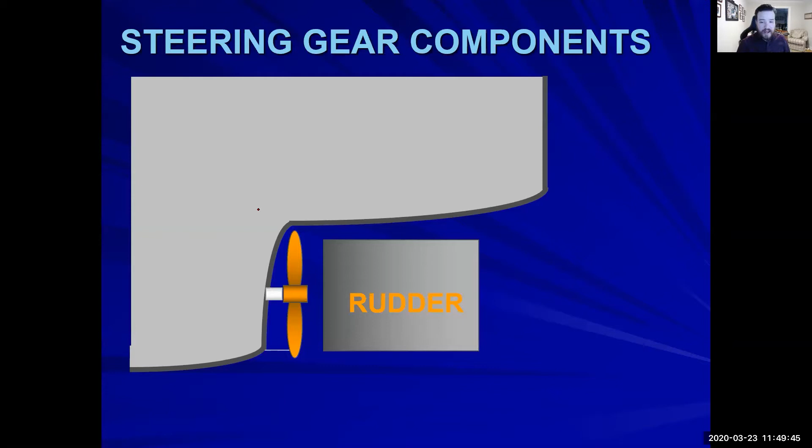Steering gear - we have our rudder, we have our rudder stock, we have our tiller, we have our steering gear pumps, our 6-way valve, and our rams. All right, big thing here.

With our 6-way valve, this only controls which steering gear pump is online. It does not control the flow of which way the rams go. They only control where the flow is coming from and where it is going to.

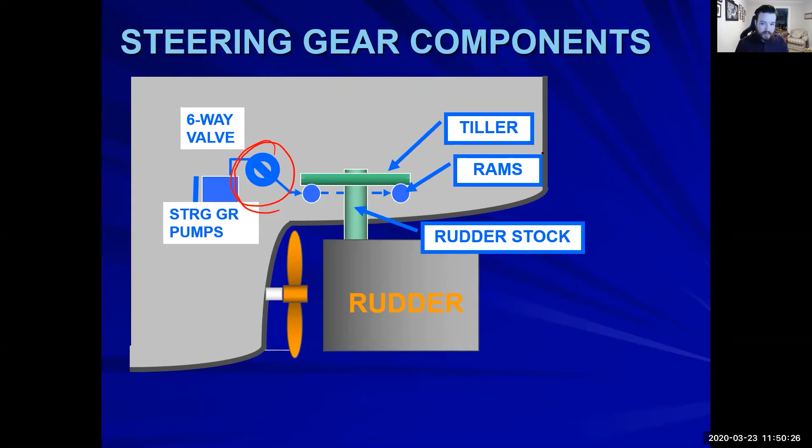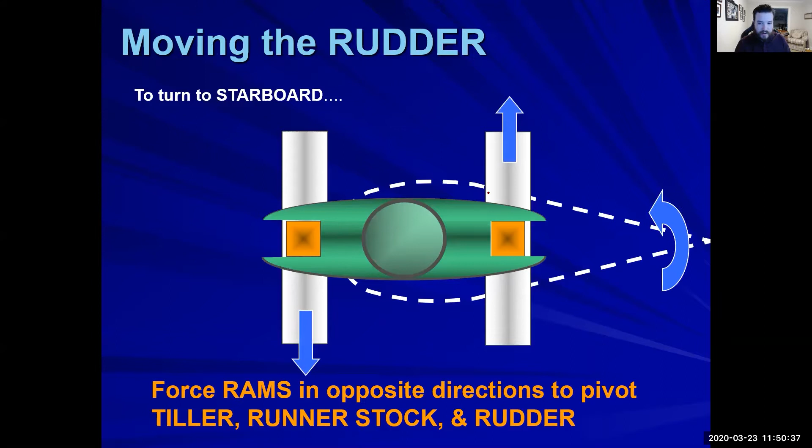So the rudder is moved by what's called the Rapson slide. The rudder is moved by these rams. So if you turn it to starboard, this is the Rapson slide that's actually happening. This is basically a cube that sits on top of the slide, on top of the ram itself, and the Rapson slide is hugging it basically on either side. There's no gears internal of it - there's nothing in here that's doing any sort of gearing. It's basically metal on metal that's sliding across itself.

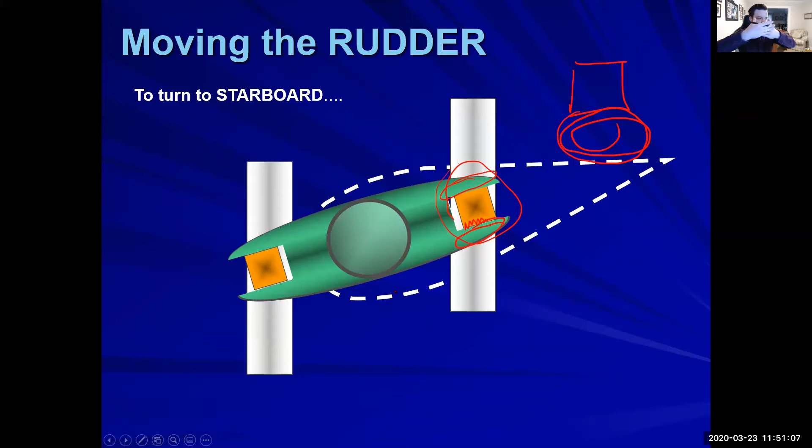So the rams are going to be moved by our steering gear pumps. We have a starboard discharge right now, and with that starboard discharge, we're not only pumping hydraulic fluid into here and into here, but we're sucking out hydraulic fluid on the opposite side of the rams, and they're going into these cylinders and pushing the rams in opposite directions.

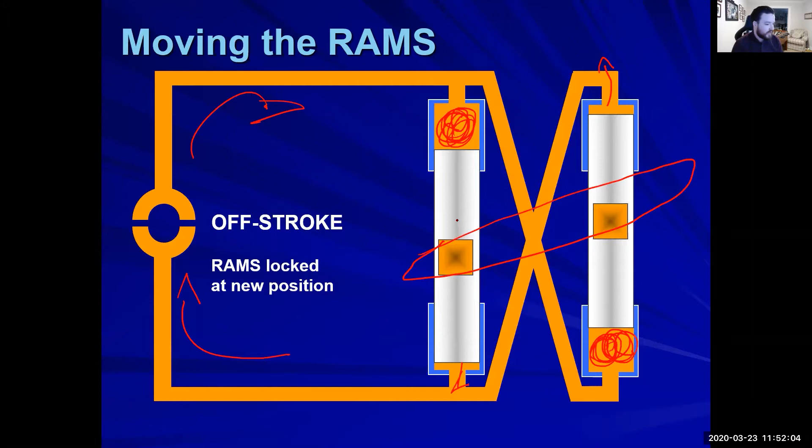So now basically our rudder would look like this in this position of what we see here. So if we have a port discharge, the opposite is what's going to be happening.

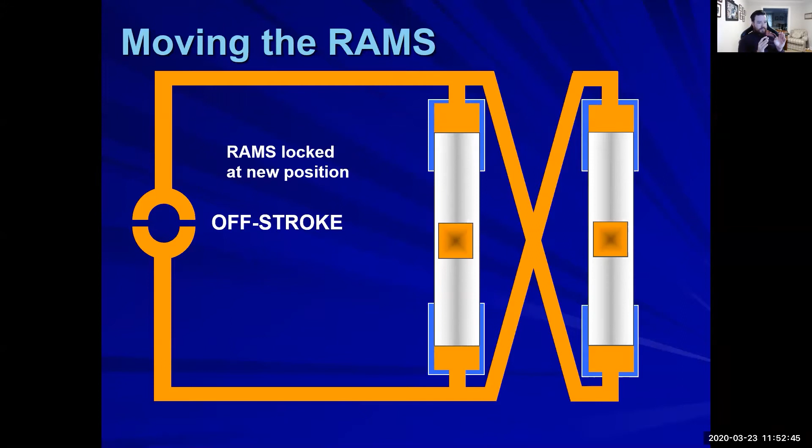All right, so remember we have our actual pump - it's always spinning. And the tilt plate right here is what's going to be controlling the flow. We still have all of our little pistons inside going up and down. The tilt plate is in its neutral position, you're going to have no flow going out.

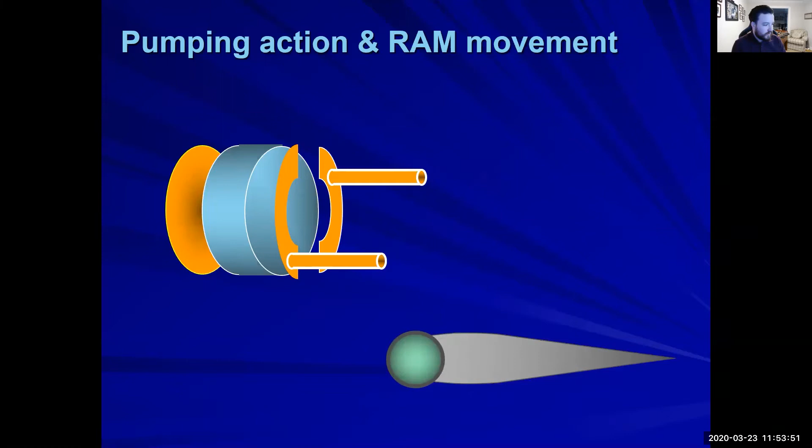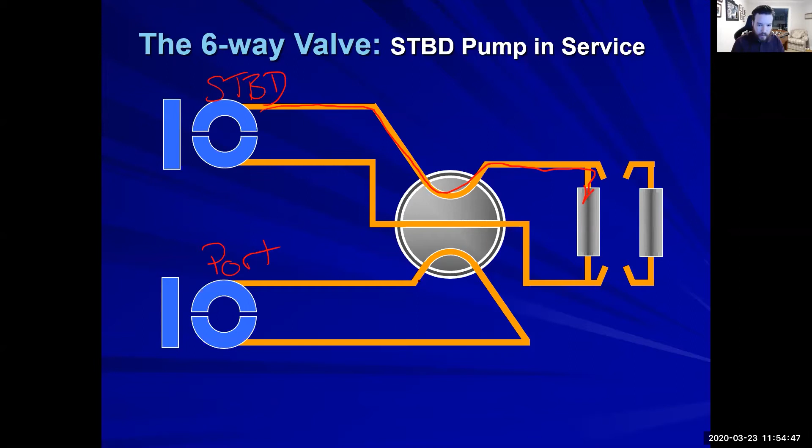If you know, just unmute yourself and say it to the group. Starboard's online - the starboard is online. We can tell because we can trace out these lines as they go into the rams, and the port one is just recirculating itself. So the starboard pump is online and the port pump is either on standby or it's running, but it's not actually producing flow to go to the rams - it's just recirculating itself.

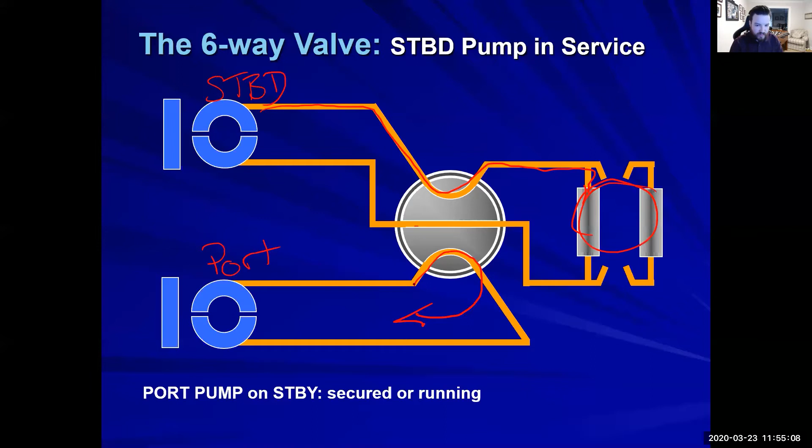Now, the big thing is like what we talked about two weeks ago - these tilt plates right here and right here are both going to be operated. The yoke from the differential is going to be tilting both of them at the same time, but because of the six-way valve, only one of them is actually going to be sending fluid to the rams themselves.

So we have flow going, our tilt plate has moved, and as you can see, only the starboard pump is actually going to be influencing which way the rams are going. The port pump is just recirculating. We come back to neutral, and the rams are hydraulically locked at that position. We go the opposite direction - it still does not matter, the port pump is still on standby.

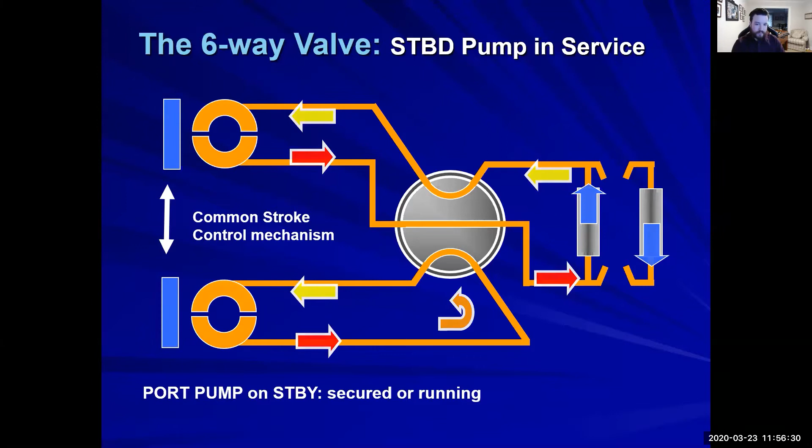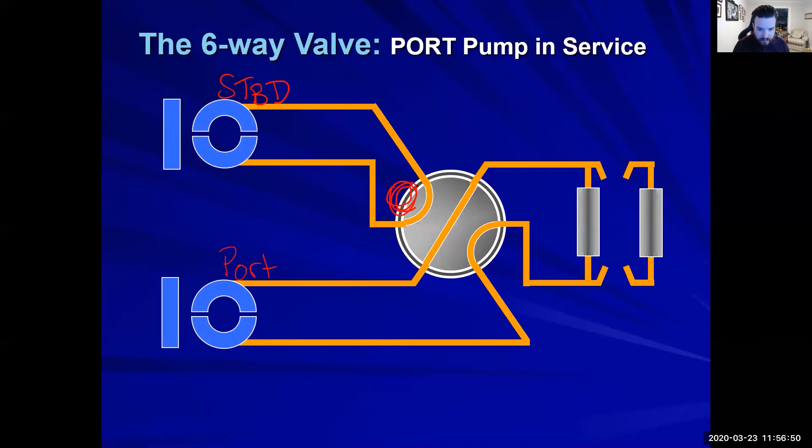All right, and now we have switched, and our six-way valve is now going to have the port pump online, and the starboard pump is now on standby. It's recirculating right here. The same thing again—it has complete control over which pump is going to be the one that's actually influencing our rams.

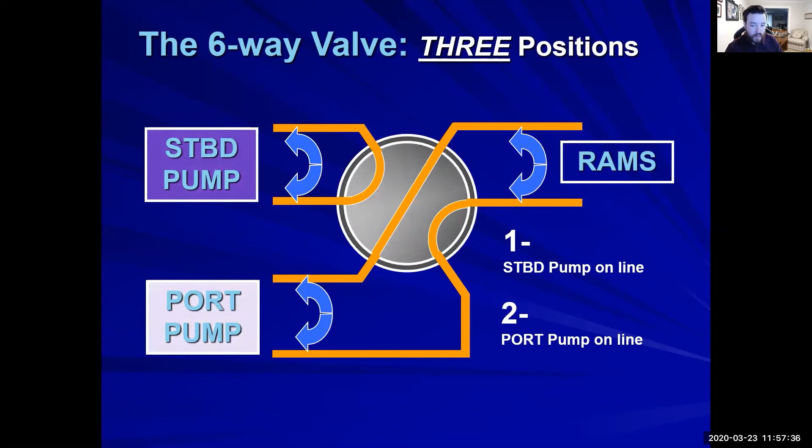So we have three positions, even though it's called a six-way valve. It's called a six-way valve because there are six ways the fluid can actually be going. So we have our starboard pump online and our port pump on standby. The second position is the port pump online and the starboard pump in standby. And the third position is where it's locked—the rudder is hydraulically locked, and there's no fluid flowing in any direction.

We would use this when we're in the shipyard and in dry dock and need to do something with the main shaft, like pulling it out, or doing work on the rudder itself. We want to basically dead stick our ship, meaning we have no power on the ship, like when going up the Hudson or something like that.

And basically tugs want to have full control and predictability. We don't want the rudder to just be going off and doing whatever it wants.

So does that mean that we don't need to change valves to relocate our rudder? What do you mean by that? Previous page.

So remember, this is a 6-way valve. It's going to be spinning on an axis, spinning in a direction either this way or that way. As it spins, it's going to choose which way the flow is going to be going. So if we have our rudder here, in order to change the direction, we don't change our 6-way valve's position.

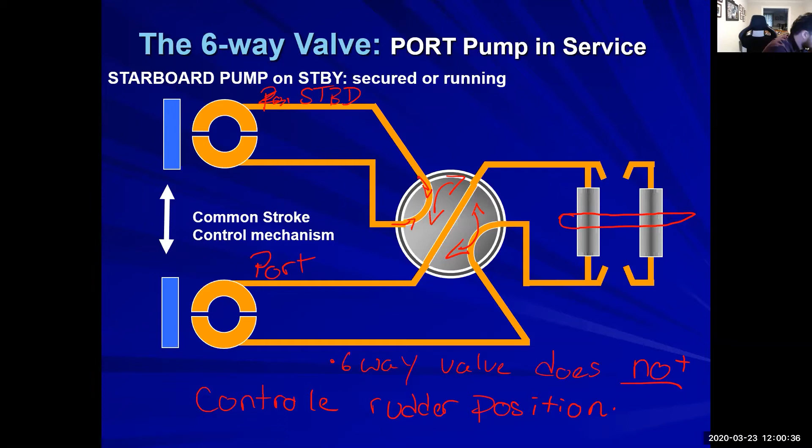Okay, so the third position is—like I said—for when you don't have power. You don't want to have, if you are trying to lock it, it's not going to be utilized during normal procedures. You're not going to be locking the rudder when you're going across the Atlantic or anything like that. This is for emergency situations, when you are allowing tugboats to have full control over you, if you don't have power, or if you have a leak on one side or the other.

So if any movement of your—say if you have a leak coming out of your rudder stock, with any movement that you have, that's when you would want to have your six-way valve locked, so that way you don't have any movement coming in. Remember, both of your tilt plates control the flow of hydraulic oil.

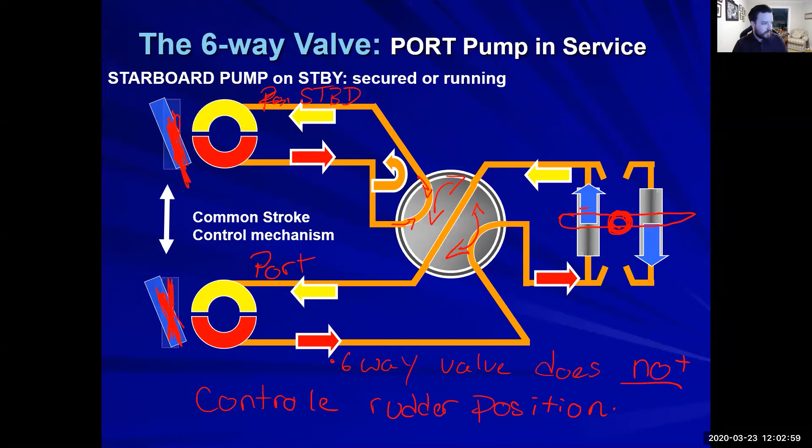So rudder locked is going to be like an emergency situation. It's going to be if you want to be dead sticking, which is when you have no power on the vessel and tugs are going to be pulling you to the boneyard or scrapyard to make the ship into razor blades, or if you just came out of dry dock, anything like that. How's the rudder lock with pumps offline different?

All right, any questions on that? Is there any significance to having one pump on and not the other? Like, will the port pump make me turn faster towards the port side? No, it'll have no difference for what's going on.

It's basically a backup. Like we talked about in class, if you have a lead-lag scenario, this wouldn't be that. This would be: you have your port pump online, starboard is on backup. So if you're going through Hell's Gate, you don't want a pump that's going to go offline suddenly and leave you with no ability to steer. You'd only want to be able to change over your six-way valve really quick, and then you have steering back.

These are just backup scenarios, basically weekly or monthly depending on what ship you go onto, your pumps will be changed over. So we're going to go to starboard this week, next week we're going to go to port pump. You just basically go back and forth. Any other questions?

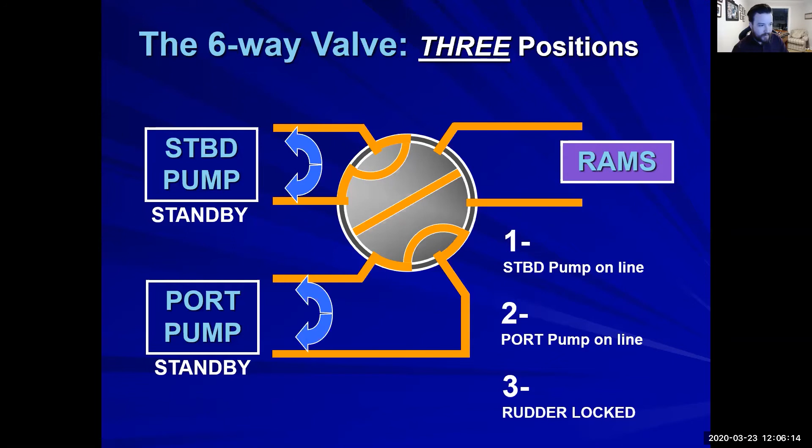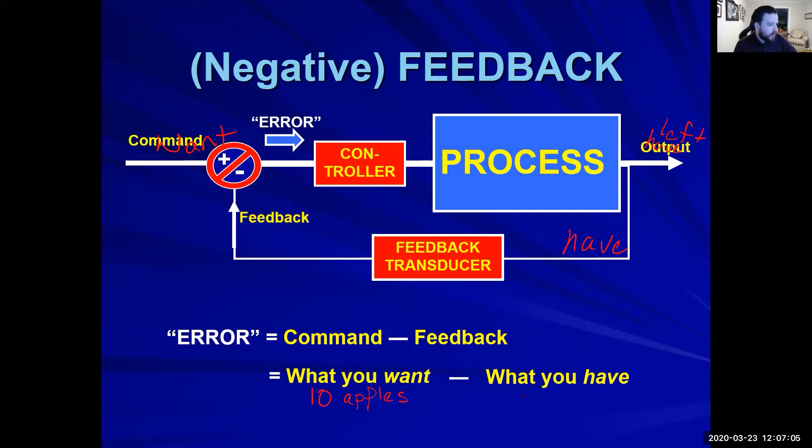If you're having a recipe that calls for 10 apples, you want 10 apples. What you have in your cart at that moment when you reach the apple bin in the grocery store is 0, so 10 minus 0 means you still need 10 apples. Now you still want 10 apples, but what you have at that moment is 1 apple, so now your error is 9 apples. That's constantly happening when you have negative feedback.

You're not sitting there doing this basically naturally - you're not going 'oh, I need 10 apples, oh I need 10 apples, oh I need 10 apples' and counting up to 10 every single time. You're basically grabbing an apple out of the cart: okay, now I need 8, 7, 6, 5, as you go through with it. That's a negative feedback loop.

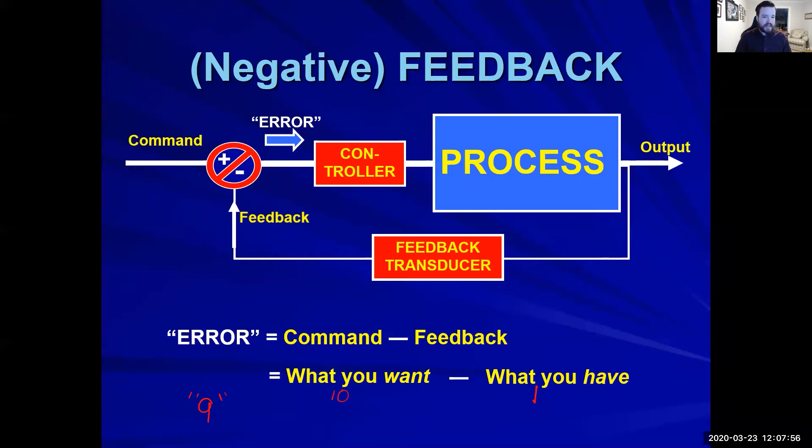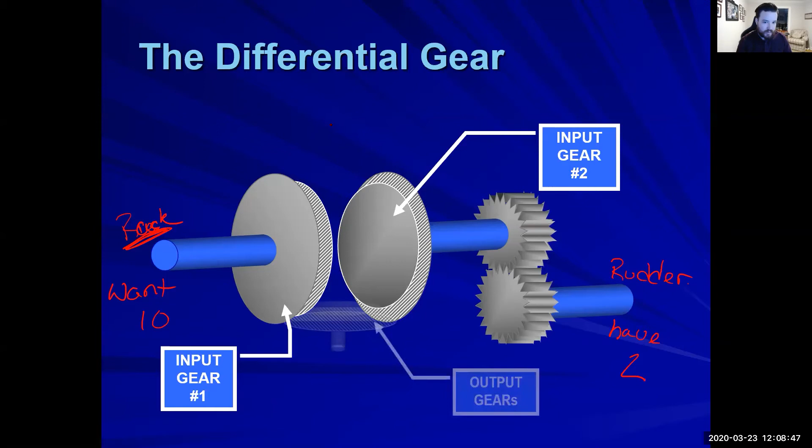Whereas the rack, this is our want, and this is our have. So we want 10 apples, and we have, right now, 2 apples. So our output, coming out on our output, means that we still need 8. So this is our want, and this is our have.

So as these turn with a differential - when you guys had your last lab, a lot of people learned about the spider legs. The spider legs are what come off of this yoke, so they go up and out and right to the tilt plate. That's what you're seeing as far as the movement is coming from these yokes.

That's a laser pointer, that's not a pen.

This yoke is controlled basically by these input gears. If you take your right hand and your left hand and try to put them together like this, and if you turn one hand or the other, it's going to force based on each force happening with those gears. It's pulling it. You could feel one hand having to go in the opposite direction to allow you to move. So your left hand down here is your input gear, and your right hand up here is going to be the output.

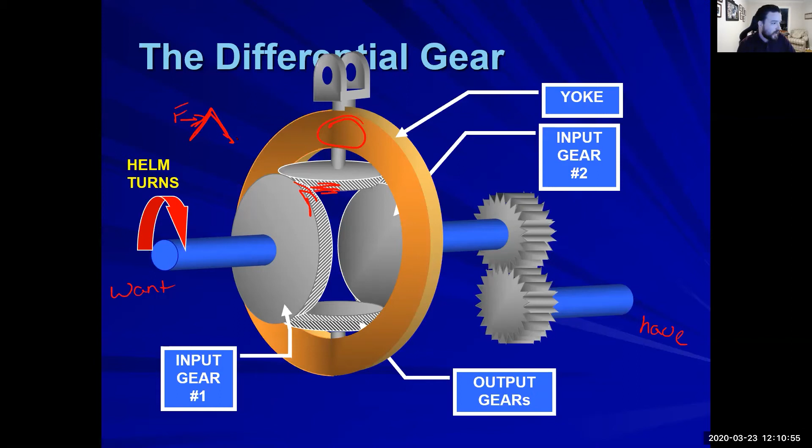If you start spinning this input, it's forcing your other hand to go in that direction. That's what's happening here. These gears right here and right here are forcing this yoke to move because it has nowhere else to go. They are geared together. Each gear is applying a force on that gear tooth, and that gear tooth has nowhere else to go, so it has to go in the only direction it can, which is to spin. And in turn, it's going to spin this yoke.

Now, this input gear coming in here is what we have at that moment. That is coming from our rudder, and that's what's causing our negative feedback loop. It's what we want. This is what we have at this moment, and what it's coming together with is what's telling our tilt plate.

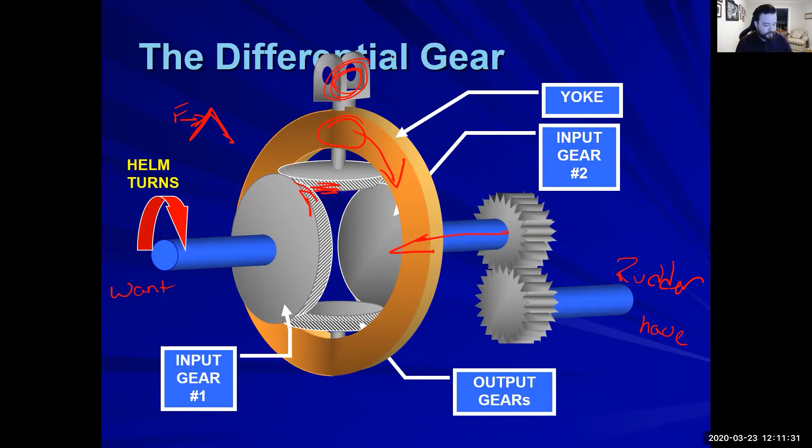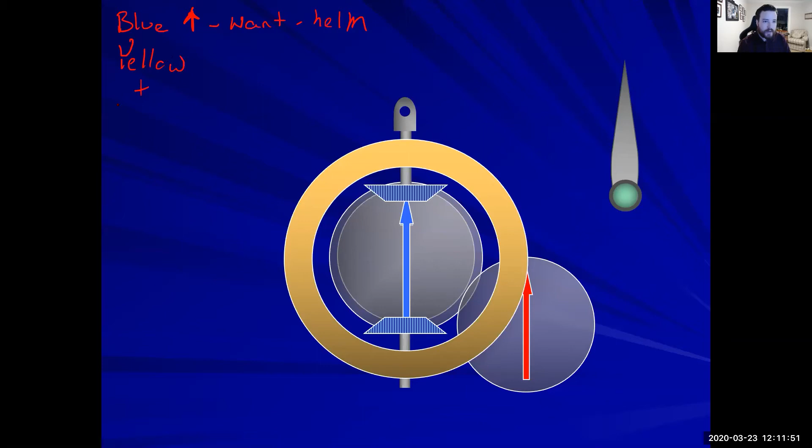So the blue arrow itself, that is going to be our want, or our helm. Our yellow and red, and that is what we have, and that is our rudder.

So as the blue arrow is moving, that is coming from our helm. It has moved the yoke. And now watch this with new eyes as you go through with this. Watch that again. We want to turn to starboard. The yoke is turning. Great, great, great. As our feedback comes in, watch the yellow and how it corresponds to what's happening with our yoke.

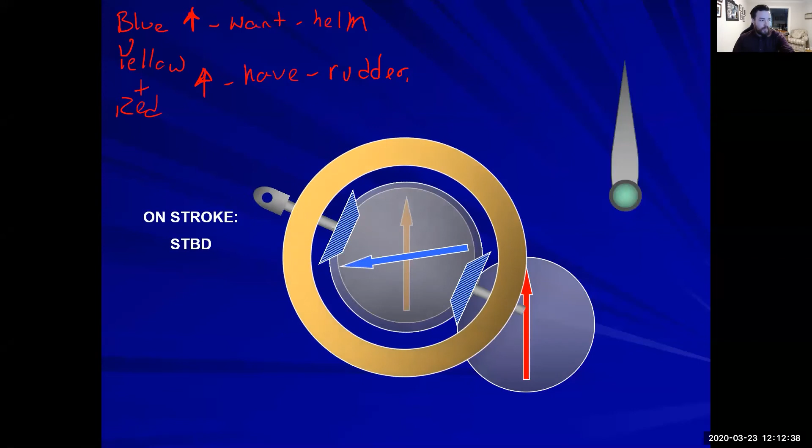We are having an input put in. We want 10 apples here. All right, we have 9, 8, 7, 6, 5, 4, 3, 2, 1, 0. We are now at what we actually have achieved. And that is why every single time as we go through, we are having less and less need to be on like an on-stroke mentality.

Does this differential make sense? More sense than what we were seeing last time? Doing good? Okay. Any questions on the differential before we continue with the rest of today's lesson? Nope? Okay.

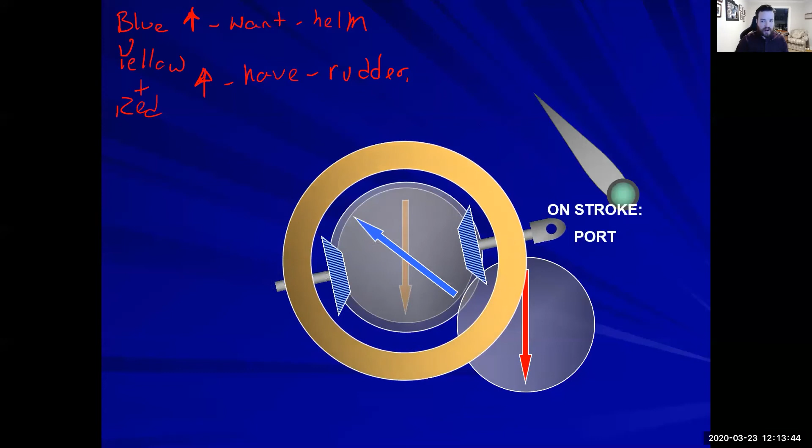So same thing as we go back. We're on stroke, we're going to starboard. The yoke is changing our tilt plate. We have a matching, basically the rudder matches. That input comes back in. Now we want to go back to center, so now we're going to have a stroke that's going to port. So now it's moving all of it back the opposite direction.

So what turns the input gears? All right, so we have two things. Input gear number 2 is coming from the rudder, and input gear number 1 is coming from the rack.

Does this change for different types of steering, like if it's follow-up or non-follow-up, or if it's the wheel or the stick? If you have a joystick versus a rudder, let's just keep to a steering wheel itself at this point. If you were to utilize a stick, it would have the same idea, but let's stick with just the helm itself and not go to a rudder. Thinking of a joystick in that mentality just gets confusing as far as where we're going. It will still have the same effect of what we're doing, but it gets a little more convoluted to understand. Stick around at the end of the lesson, we can go over that if you want to.

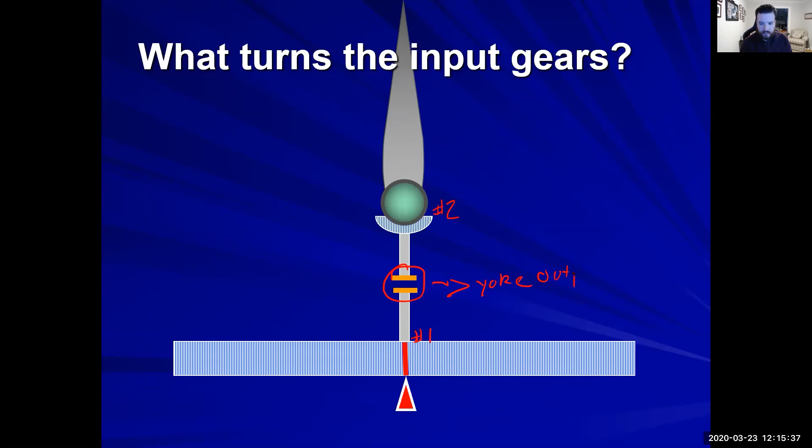So we have what's called the rack and the rack's position. The rack is basically an entire gear that's opened up. There's all these teeth all along it. And a position on the rack is a direct indicator for what you want to do with the rudder.

You'll have your 0, and that will be the center line of the ship. You'll have a 5 degree, you'll have a 10 degree, and all the little lines. It will basically look like a tape measure on there.

Now this right here, this shaft coming out, is going to be a gear, as I show off my drawing abilities of a gear. This is going to be spun. This gear right here is laying on top of the rack, and it's going to be spun by the direction of which way the rack goes.

There was a question here: when the yellow arrow turns, is that desired? We have reached the desired rudder angle. Yeah, so when the yellow arrow is turning, that is basically what is coming back in from the rudder. What's happening is we are at the blue arrow on the last screen as we go back. So as the blue arrow turns, that's coming in from the rack. That is what we want.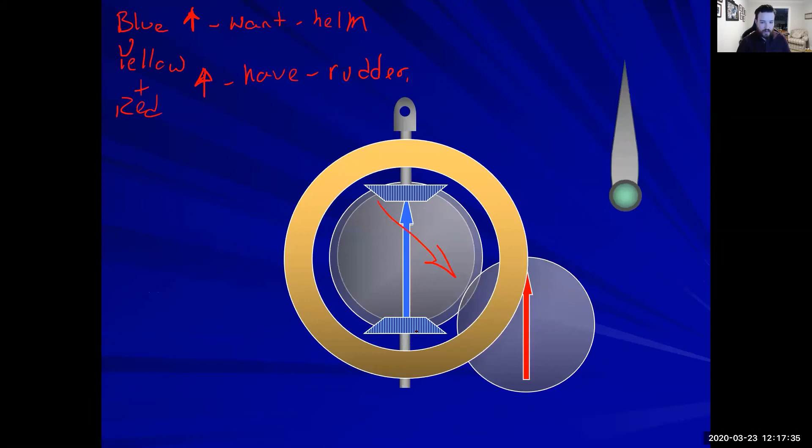And as the yellow arrow is turning, say it was like here, halfway, that means that the rudder is in its halfway position to what we want. And if you notice the yoke, watch the yoke as the yellow comes back. The yoke is slowly turning back and it goes to its neutral position. As soon as the two arrows meet and come together, that is when we are now on a 0 stroke. We are in a neutral position. We are no longer having any flow going through our hydraulic pump.

So we have our rudder position, we have our rack position, we have our tilt box. Let me delete some of this nonsense. This goes directly out to our tilt box. This is the yoke, like I said. So whichever way the rack goes, that is going to be directly affecting which way the rudder is going to be turning.

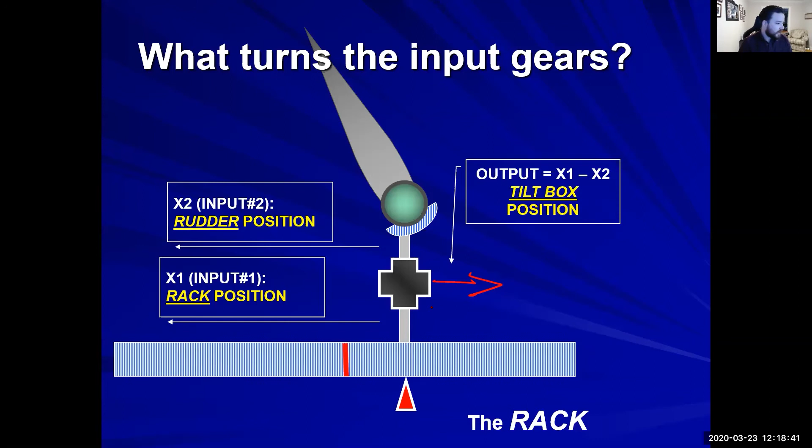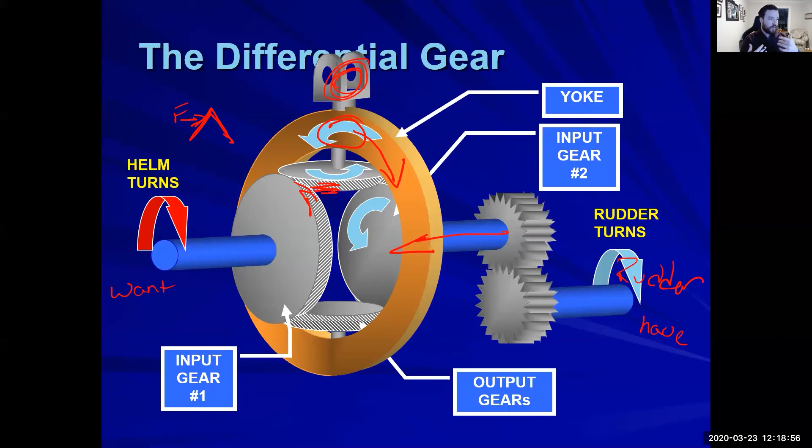Can you explain what the yellow does again? That yellow arrow is what's coming in from the rudder. That is our input, basically our negative feedback. That's how many apples we have in our cart presently. So the yellow arrow is what we have at that moment.

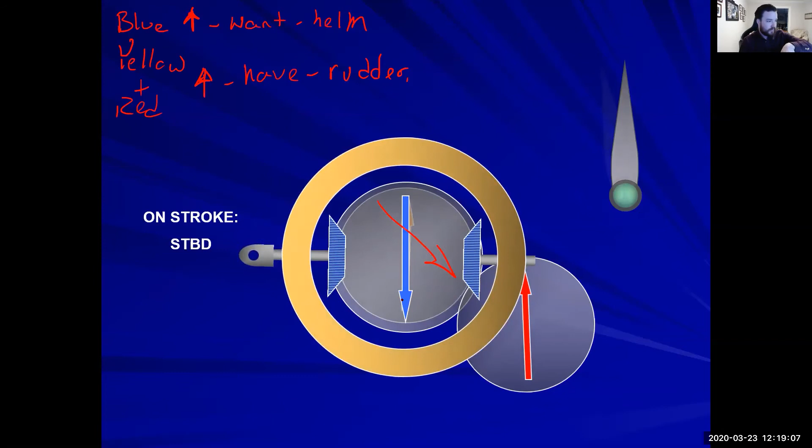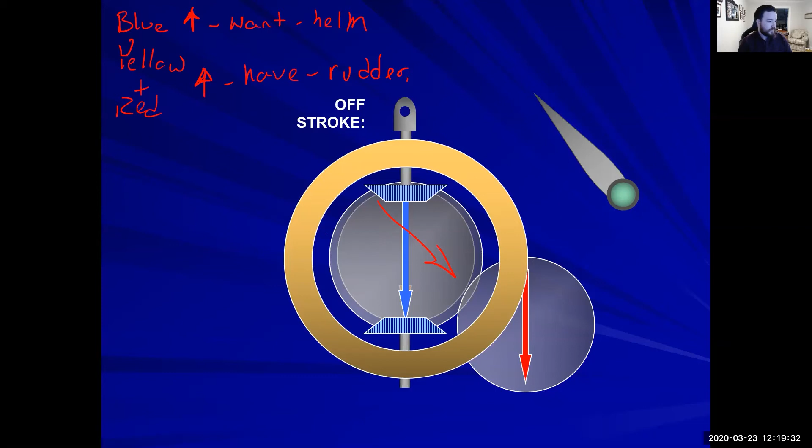Whether we want to go to 10 degrees right rudder, while it's moving, we're going, okay, now we're at 1 degree right rudder. So the yellow is saying, okay, we have 1. And as it continues down that line until it reaches 10, it's going to be saying, we still don't have what you're telling me we need to have. Does that make sense? Okay.

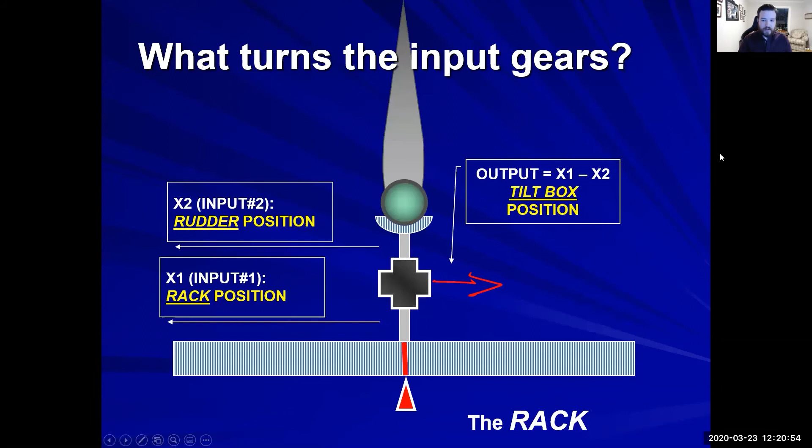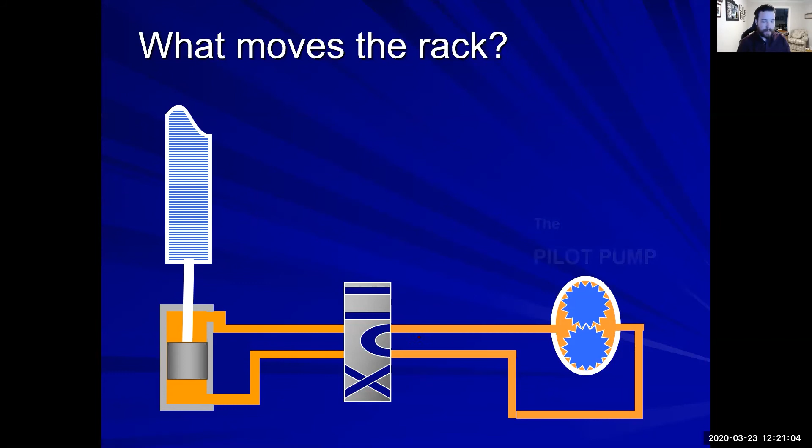So now we're going to go through what actually moves the rack. The rack is moved via hydraulics. We have this pilot pump. This pilot pump is going to be spinning at all times, it's not going to not be spinning. We have 3 positions with the shuttle valve: we have a normal flow right here, we have a reverse flow, and we have a recirculating.

So as the pilot pump is always pumping, when we have our steering gear system up, we are going to be in one position or the other. If we're in this position, we have a straight flow. We can see hydraulic oil comes through and onto this side, and we have pushed the rack this direction.

Now, if we go the other way, we have a cross flow. That means we are now pushing on this side and sucking from the other side. This side was pushed and this side had flow that was getting sucked out of it.

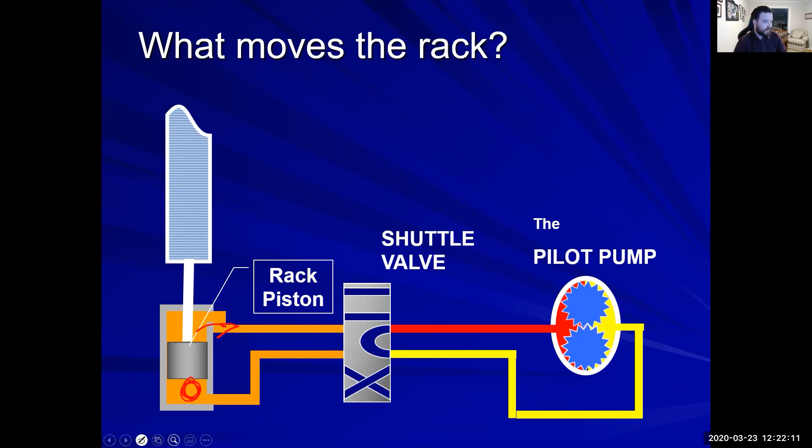Now, what controls the shuttle valve? The shuttle valve is directly controlled via the bridge. This is where the helm sends the signal.

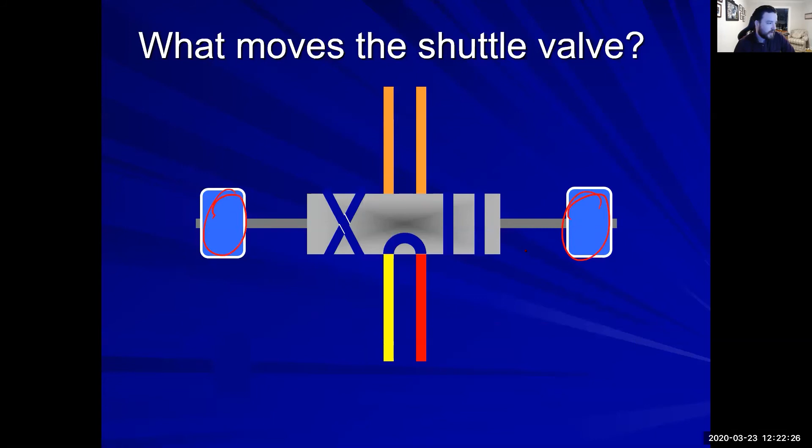Over here is a solenoid valve, and over here is a solenoid valve. They're basically magnets, electrically coiled wire with a magnet in the middle, and that magnet in the middle are these poles.

So when the solenoid is energized, you can see it pulls in the magnet, and vice versa.

So we have, like I talked about in class, two different types of solenoid valves: a normally open and a normally closed solenoid valve. A normally open solenoid valve is when it's de-energized, the magnet is normally pulled into the coil. My fingers are the coil, and this is the magnet. It's going to be pulled into it. Normally open is when there's no electricity flowing through the wires.

Normally closed is the opposite. If there's no electricity, the magnet is pushed out.

Now, both of these are done for safety. Normally open, just like when we were talking about making water, if you were to lose electricity, you would not want to send salt water to your distillate tanks. So a normally open valve would not be utilized on the valve that goes to your distillate tanks. It would be utilized as your dump valve, so if you lose electricity, water would flow and then dump. Now, the valve that would protect your distillate tanks would be normally closed, so if there's no electricity, it's stopped and no water will flow into it because it's in a normally closed position.

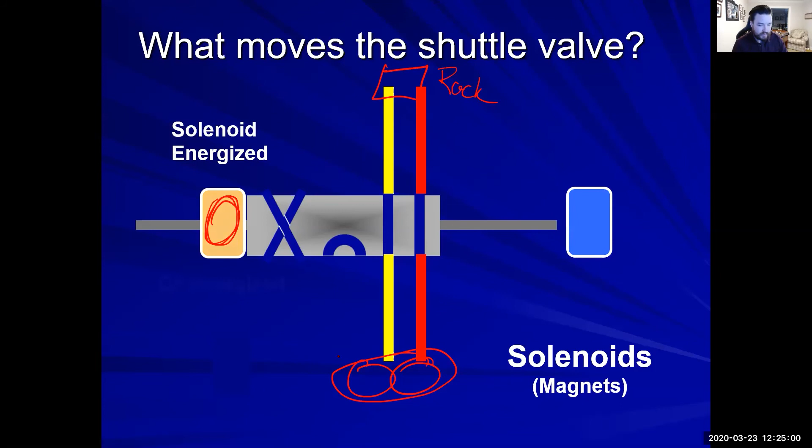It de-energizes, we have no flow. It is still recirculating through the pilot pump, but the rack has not moved. We want to go in the opposite direction, so we are now going with a cross flow, and our rack is getting flow. The piston is moving, and the pilot pump is still having flow going through it.

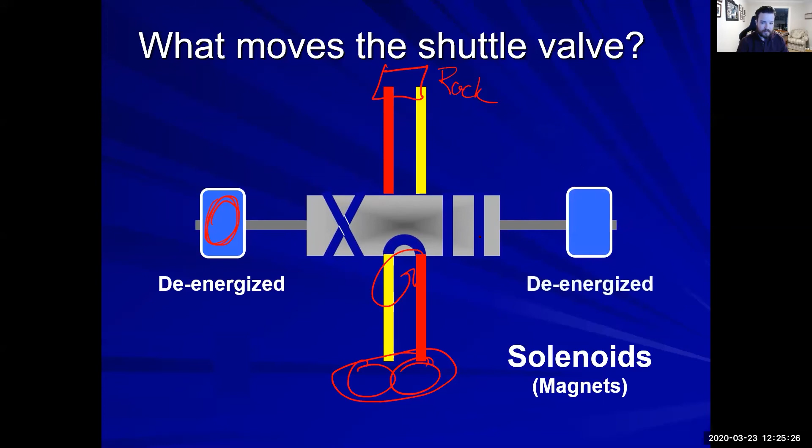So how are the solenoids energized? This is what we didn't get to last class. So when you turn the steering wheel, you are going to be generating an electrical signal.

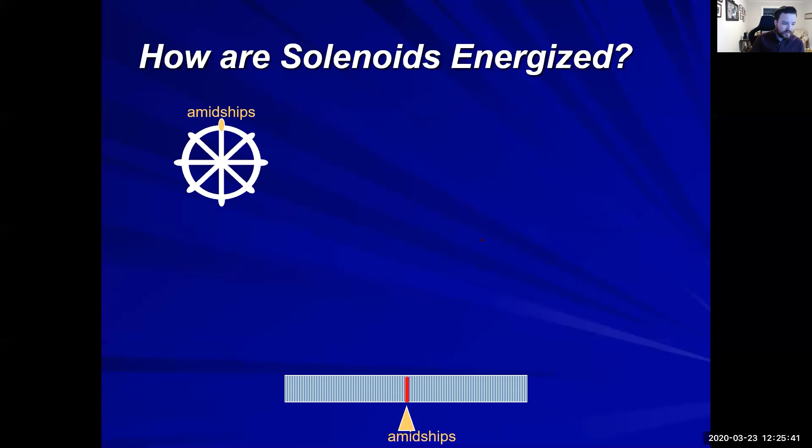So when you turn to port, you are going to generate a positive voltage. The more you turn to port, the greater the voltage is, so they're proportional. And again, if you have less of a turn to port, it's going to be a lesser voltage.

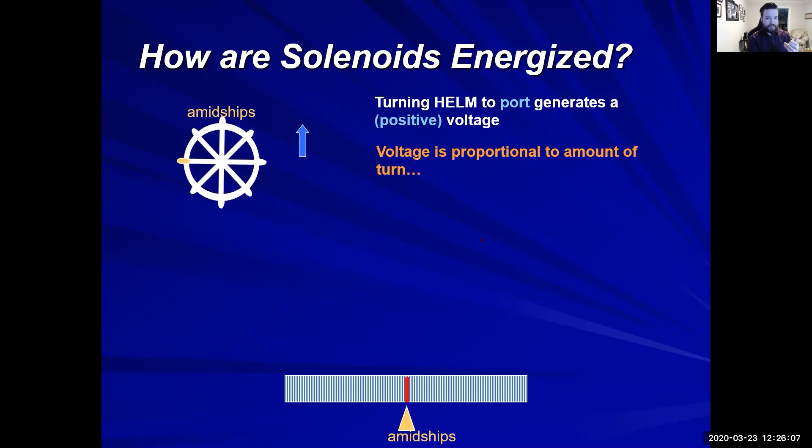Now, when you go to starboard, you are going to have a negative voltage, and the same thing again, it's proportional. The more you turn to starboard, the greater the negative voltage is going to be.

And now you can see the rack moves to port, generates a positive voltage. The more it turns, the greater the voltage you're going to have. They're both proportional to each other.

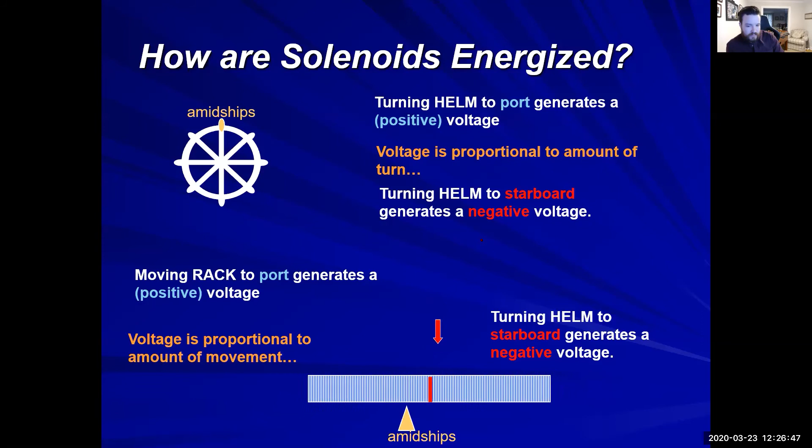We'll get back into this when we do electrical, but for right now, we're not going to deal with this. So these couple of slides, skip when you're doing your own review.

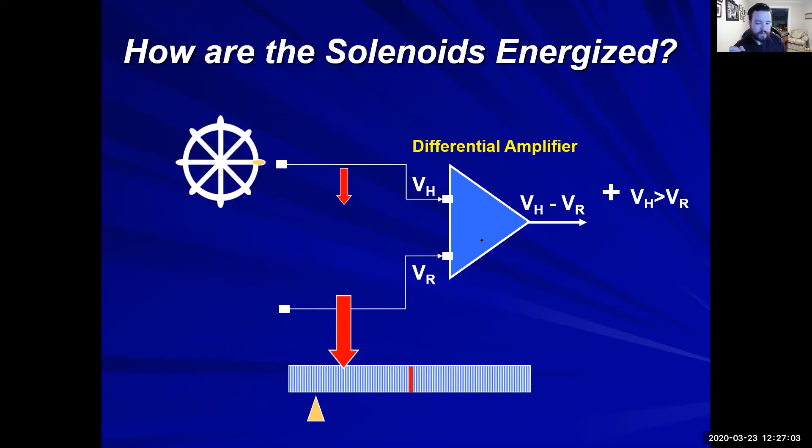So we have our helm position and we have our rack position, and we have our difference, kind of the same thought as our have and our want. So the helm position goes to port, so we have a positive voltage, so it sucks in on this side.

All right, when the helm position equals the rack position, now we have a difference of 0. So we go into neutral.

So now we're just going to be flowing back to our pilot valve. And then the opposite is true. When we go to starboard, you're going to have a negative, because the helm has a negative voltage. The rack position has not met that negative voltage. It has not equaled it to create 0. And as soon as it does, we go to a 0 position, but our rack has not moved past that.

Just because we have a 0 differential doesn't mean that the rack has now moved back to the 0 point. It just means that both the helm and the rack are both in the same position. So if we want 10 degrees starboard, until we achieve 10 degrees position on our rack, remember I told you the rack has different markings on it.

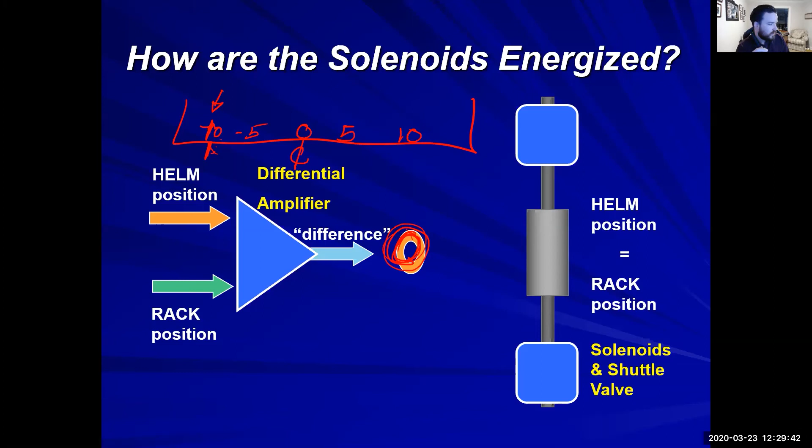All right, does that make sense? Does anybody have any questions on it? Okay, take your eerie silence as a yes.

So as we go through the steering sequence, there's almost 2 parts to it. Part 1, as we go through, you have your steering gear pump running on off stroke. So the tilt plate is in the neutral position. The pilot pump is running. It's recirculating right now. We are not having any flow going to the rack.

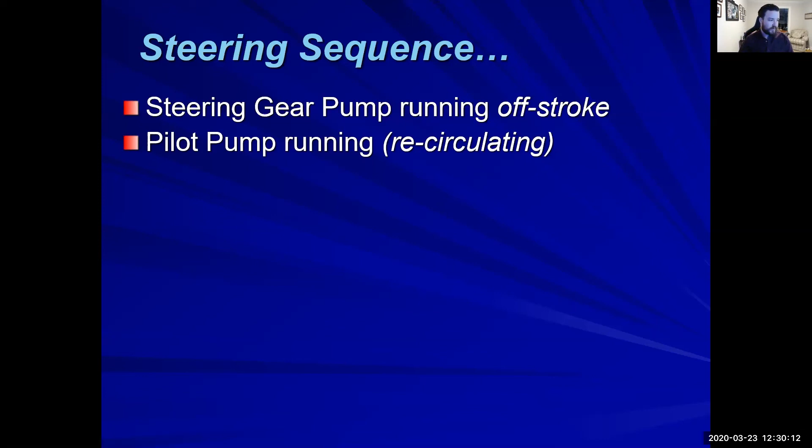So the helm calls for right rudder. The starboard solenoid valve energizes. The shuttle valve position directs the pilot pump discharge to the rack piston. So that whole entire evolution we just talked about with our solenoid.

The starboard solenoid is energized. We now have flow going through to our rack, and it's pushing our rack. And as soon as the two meet and have a zero differential, that starboard solenoid valve will de-energize and bring it back into the neutral position. And the rack will stay in the position it was affixed at.

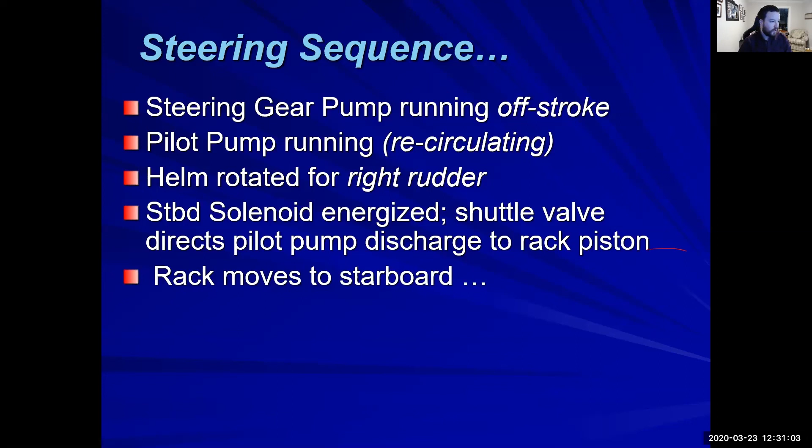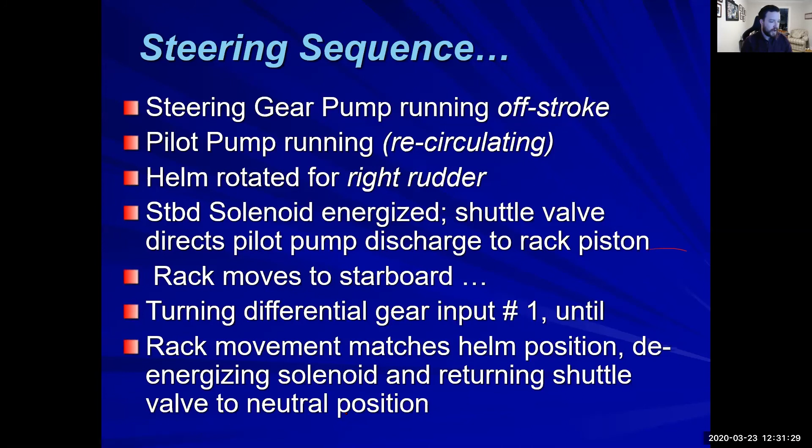So the rack moves to starboard, turning the differential gear number 1. So this is the position that's coming from the helm, from the rack. So the rack movement matches the helm position. It de-energizes the solenoid and returns the shuttle valve to the neutral position. So now we have no flow coming out of that pilot, it's just recirculating.

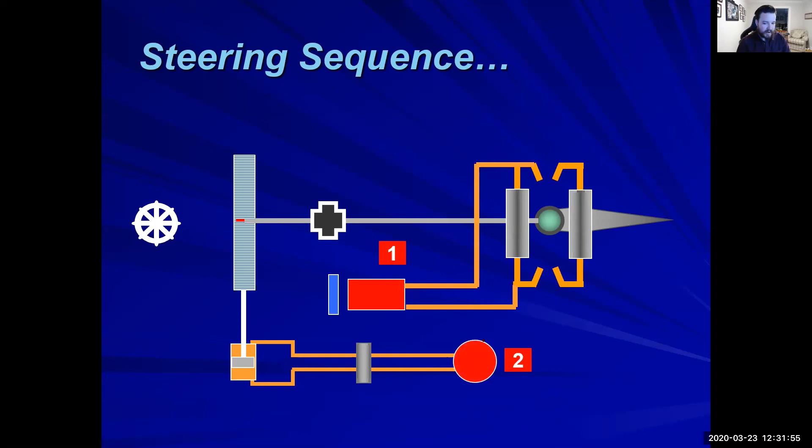All right, so this is what it is in image. It's going to use numbers. Unfortunately, it doesn't have numbers here. So number 1, this is our steering gear pump. It is just moving, not circulating any hydraulic oil. Here's our pilot pump. Again, it's just moving, it's not circulating anything. When I say it's not circulating, it's not going to our rams and it's not going to our pistons. It's just recirculating the flow.

We turn our helm to starboard. Turning our helm to starboard, we are now going to get movement. Our shuttle valve moves. The solenoid valve sucks it in. We now have flow. Our pilot piston comes up, so all of that flow comes in here. All of the hydraulic oil gets sucked out.

All right, we meet whatever order we wanted. If we wanted 10 degrees right rudder, as soon as this reads 10 degrees right rudder, we send a signal out to our shuttle valve and says, hey, it's the same as what we wanted. It's 0. De-energize our solenoid valve, and now we are just going to be recirculating here.

But just like what's happening in our differential gear, as soon as we have movement on this rack, we are getting input going into our differential. We now have movement going into our differential, which means that our tilt plate will start to move. So we have now moved on the rack. The rack has now given an input. The differential gear output puts steering pump on stroke. So the steering pump tilt plate has now moved.

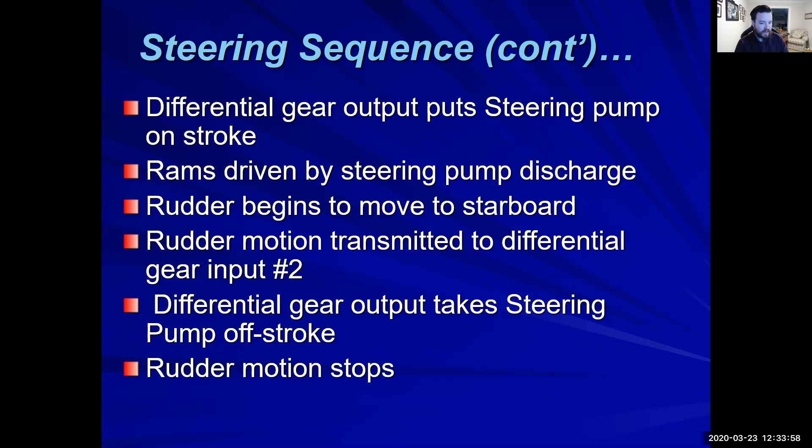The rams driven by the steering pump discharge. So they are either getting moved one direction or the other. The rudder begins to move to starboard. Rudder motion is transmitted to differential gear input number 2. Differential gear output takes steering pump off stroke. The rudder motion stops. Next helm movement will restart the sequence.

So we're going through, like I said, as soon as this moves, it's going to be inputting and it's going to be changing our differential. And our tilt plate is going to move. So now we are going to have flow going through and going to our rams. Our rams move, causing with the Rapson slide, it's going to move our rudder.

Our rudder goes and says, hey, we are now at 10 degrees, or we were at 8 degrees, and we have our negative feedback. So it feeds back to the differential. The differential says, okay, we're good, we're meeting what we want to be at, and it changes the tilt plate back to neutral.

And again, if you want to restart this at any point, if you're sitting at 10 degrees and you're thinking that's not enough, we need to go to 15, you don't have to wait for this entire sequence to be over before you can put in more input. You can change this at any point. So if you steer and go, oh, I want 10 degrees, and then you realize 10 degrees is too much even when you hit 8, you can change your input to 5, and it can stop this at any point.

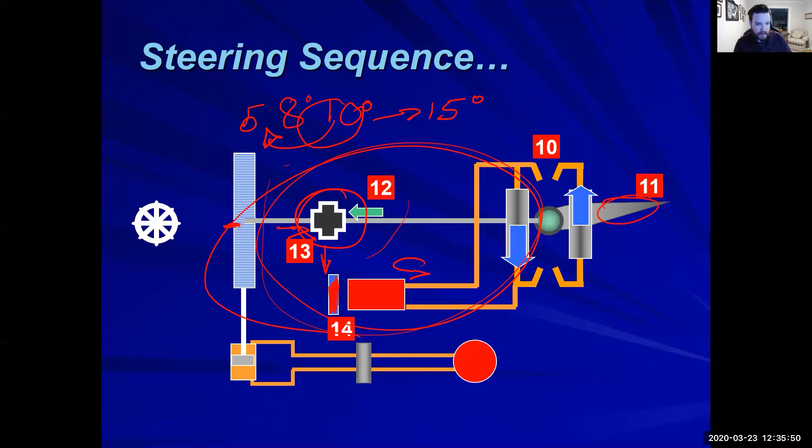Or if you realize 10 isn't enough and you need to go to 15, you can change it at any point. You don't have to wait for the sequence to be over before you continue on. It's just like steering a car. So that is it as far as the steering gear itself.

You guys have any questions on it? Does it make more sense than what was happening last class?